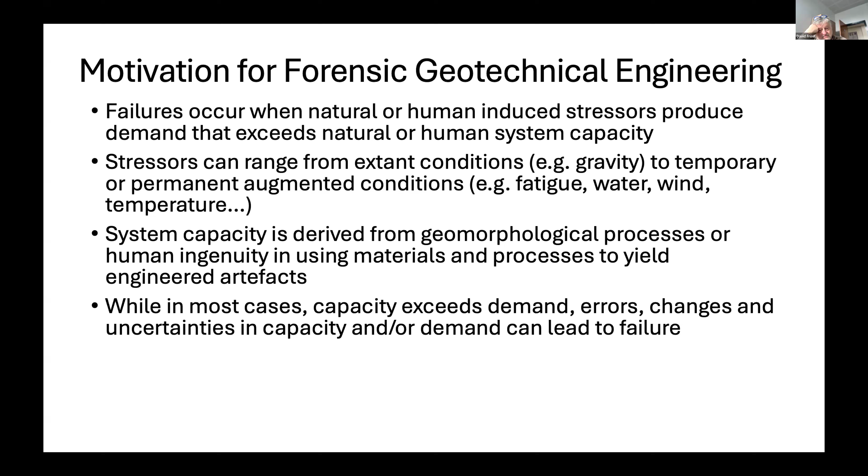The motivation for forensic geotechnical engineering begins with the fact that failures occur when either natural or human-induced stressors produce demand that exceeds natural or human system capacity. Stressors can range from extant conditions, such as plain gravity, to temporary or permanent augmented conditions, which may result from fatigue or from factors such as water, wind, temperature, and so on. System capacity is derived from geomorphological processes, or in other cases, human ingenuity in using materials and processes to yield engineered artifacts. While in most cases capacity exceeds demand, errors, changes, and uncertainties in capacity and demand can lead to failure. Failures can be either single point events or result from cascading processes that lead to failure of an overall system. Forensic geotechnical engineering offers the opportunity to learn from these failures and to ensure more resilient systems in the future.

Just a little history and purpose of TC302. It was constituted by ISSMGE in 2005 as Forensic Geotechnical Engineering, or FGE as we often say. It's involved in scientific investigations and deductions to identify the causes as well as the processes of distress in a structure or system that are attributed to geotechnical origins.

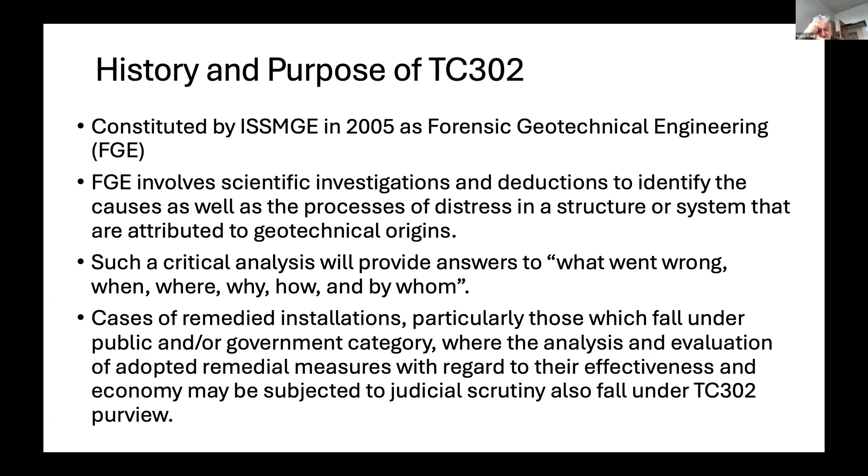Such a critical analysis will provide answers to what went wrong, when, where, why, how, and even sometimes by whom. Cases of remedied installations, particularly those which fall under the public and government category, where the analysis and evaluation of adopted remedial measures with regard to their effectiveness and economy may be subjected to judicial scrutiny, those also fall under the purview of TC302.

Just a quick synopsis of some selected past activities of TC302, predominantly in the form of symposia or seminars, listed here. Also in 2016 there was an edited volume titled Forensic Geotechnical Engineering, edited by Professors Rao and the previous chair of TC302, Professor Sivakumar Babu, part of the Developments in Geotechnical Engineering series put on by Springer. There was also a more recent seminar put on by Professor Fumio Tatsuoka on the collapse of the Fujinuma Dam.

In terms of ongoing activities of FGE, it is now conducting a mini symposium series on forensic geotechnical engineering for natural hazards impacts. It's going to be a series of symposia held in Asia, Europe, Africa, South America, North America.

The reason we're doing a series of these is in part that natural hazards evolve differently around the world, and they're also addressed with different types of solutions around the world. So we're ultimately interested in trying to understand this scenario from a more global perspective.

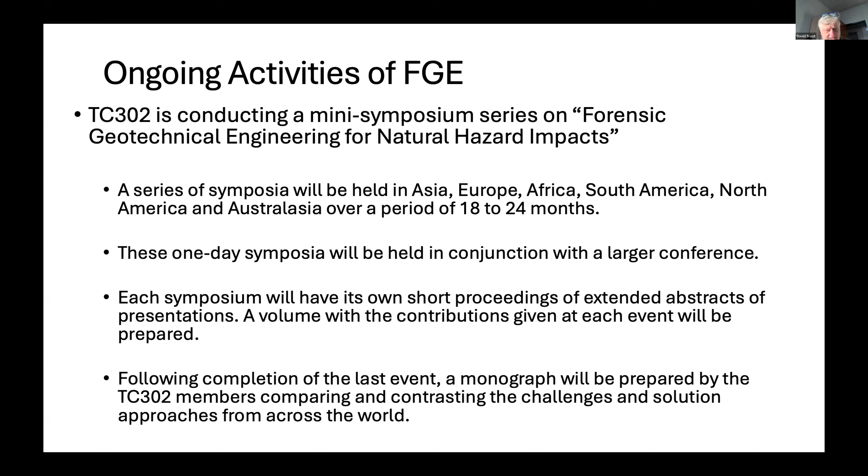These one-day symposia, typically we're holding them in conjunction with a larger conference. Each symposium has its own short proceedings of extended abstracts of the presentations made, and then there'll be a small volume from the contributions for each of those events. When we finish the last of the 6 or 7 mini symposia, TC302 will actually put together a monograph comparing and contrasting the challenges and solution approaches from across the world.

Just a bit about the ongoing and proposed mini symposia. We actually just held the first one in conjunction with Geotech Asia in Goa. We had anticipated an audience of about 50. It turned out we had 80 registered and attended, and it included speakers from government, practice, and academia.

We have 3 more already scheduled for June 2026. There'll be a half-day event in conjunction with, or as part of, ICSMGE in Vienna. In September '26, we have an event in conjunction with the CREST conference in Cambridge, England. And then in October '26, there's an event in conjunction with the ASCE Forensic Congress in Orlando, Florida, USA.

Finally, we're in discussion with folks for 2 more, which will be held in early 2027, one in South America and one in Australia. We just haven't locked down the final details of those.

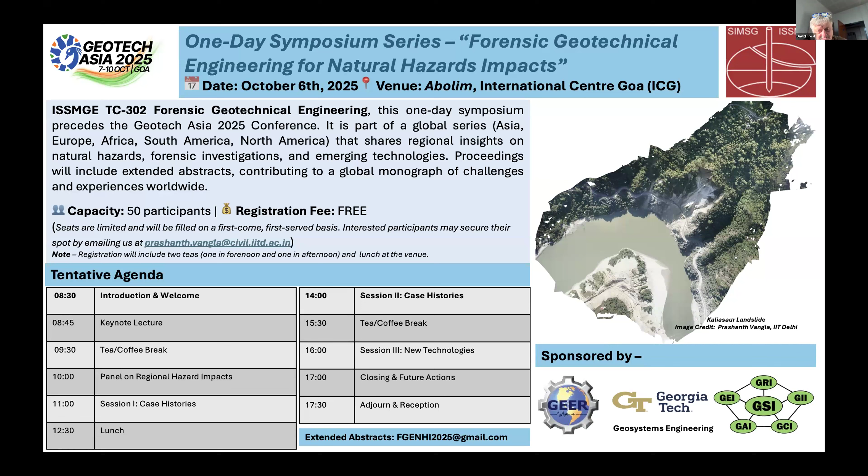This is just a quick snapshot, but gives you an idea of what a typical event looks like. This is from Geotech Asia. I think one thing we were very happy we were able to do, through a little bit of sponsorship from various entities including the Geotechnical Extreme Events Reconnaissance Association and the Geosynthetic Institute, was offer free registration to the participants, and I'm sure that also added to the value of the event.

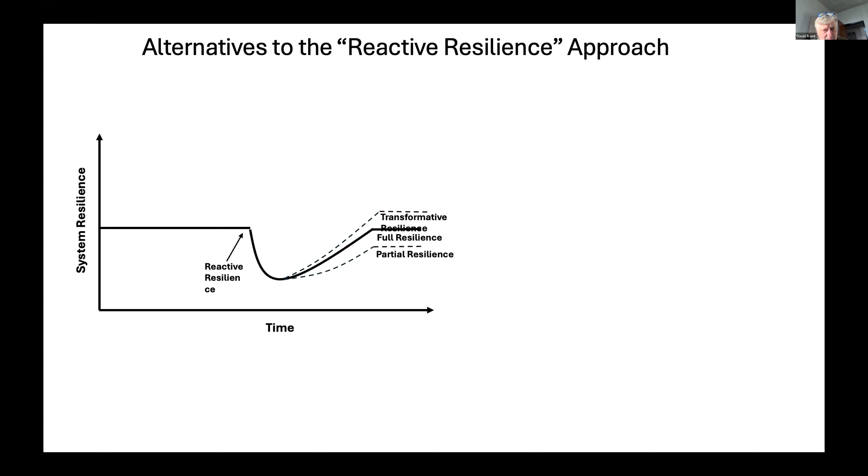All of these fall under what I call reactive resilience. And quite frankly, I feel that many times we almost accept this as the way to go. Personally, I'm not comfortable with that. I think resilient systems should embrace before, during, and after considerations, not just during or the immediate after. So in that context, resilience and forensic geotechnical engineering should not start here, though there's a tendency for that to happen.

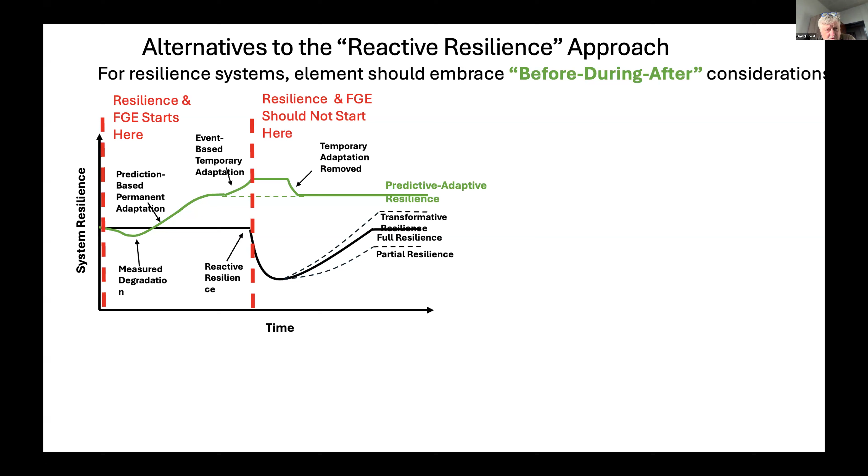But then the second part of it is what I call event-based temporary adaptation. This may be where we've made a permanent adaptation, but then as we're aware of an event about to occur, we may be able to make a temporary adaptation that will further increase the resilience. Once the event has passed, we can even remove the temporary adaptation if we like. The end result is that we end up with a higher resilience than if we just live within the reactive resilience world. I call this predictive adaptive resilience.

On the other hand, if we learn that we're going to have an even higher event, then we may think about putting some kind of a temporary adaptation on top. The most common one that all of you probably could think about right away is sandbags, and that's something that's done very quickly in the days or hours before an overtopping might occur.

That's a good example of a temporary adaptation, although it does typically create more problems because the sandbags after the event are typically contaminated, and then we have to dispose of those in landfills. So I think the idea is good, but I think we need to start to think about more temporary adaptations that don't have a legacy tail, for example one that has an environmental impact.

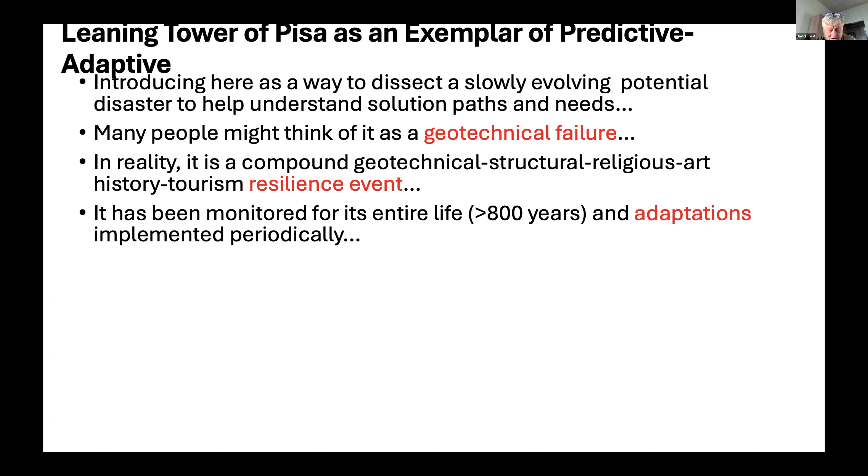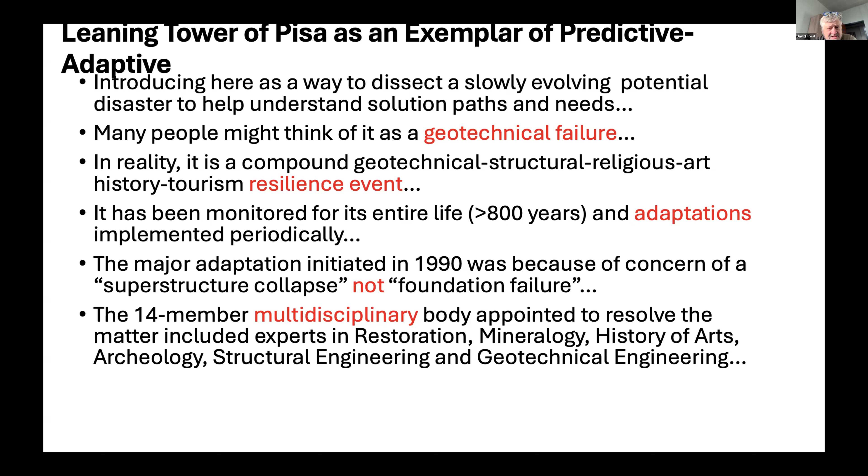A major adaptation was initiated in 1990 because of a concern for a superstructure collapse, not a foundation failure. It was a potential for a superstructure collapse that led to it. The 14-member multidisciplinary body appointed to resolve it included experts in restoration, mineralogy, history of arts, archaeology, structural engineering, and geotechnical engineering. I make that point because I think we need to recognize the importance that forensics needs multidisciplinary, different opinions, different perspectives.

I would note, however, since we're amongst geotechnical friends, it was led by geotechnical engineers, and I like to think that that's an important mantra.

So a little bit of history of the tower. On the upper left is showing the actual loading of the tower, the weight of the tower. As you can see there, and in the images on the right, they started construction in 1178 or 73. They built the first 4 stories, and then they stopped because they started to observe a lean.

In fact, they stopped for 100 years. So there was an adaptation which said no more construction—that was simply the adaptation. At that stage, they restarted, and they made some adaptations in the process to try and offset the existing lean. They added another 4 stories, and then obviously the situation continued to get exacerbated.

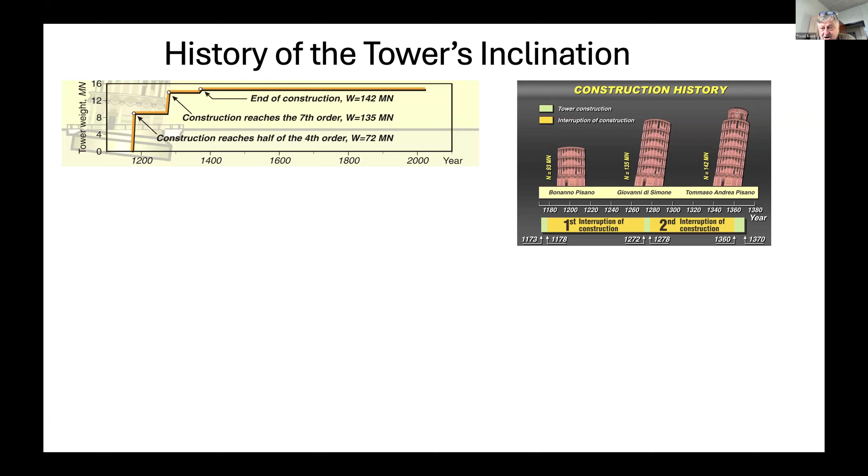So there was another second interruption for 100 years before finally they came back and put the bell tower on in the late 1300s. There were numerous—that's why, David, it's curved.

Yes, because they were going up, they were straightening, and then it kept tilting. So it has a curved shape.

Included in those adaptations, for example, they halted the construction, but they also used tapered bricks to offset the lean. They used different height steps within the tower so that for people walking up it didn't seem as inclined. They did excavation of the Catino at one stage because they thought that might help, and they tried lowering the groundwater. In fact, some of the latter two had the opposite effect. They were not good interventions.

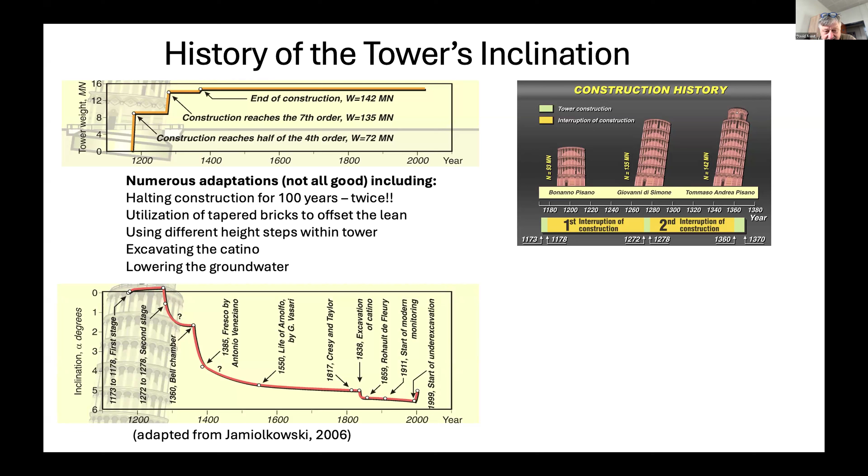This is a plot matching the one from below that was put together by Professor Jamiolkowski, showing the inclination and the lean. You can see that clearly things were progressing downwards, and that's why in 1990 they closed the tower and realized there needed to be a major intervention.

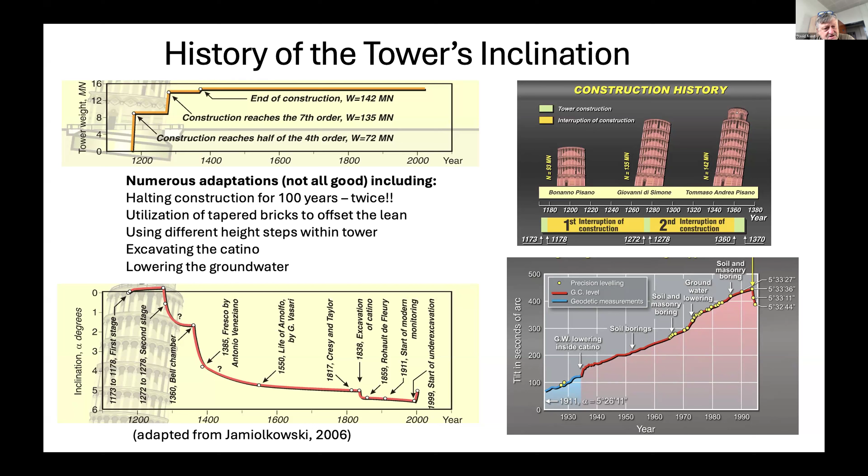This is a more detailed look at some of the more recent movements, over the period from 1930, so the last 100 years. All of these various dots show times and places where people tried to do interventions. The bottom line was anytime they tried to do a serious intervention, the tower responded. It was not happy with humans dabbling around.

So let's come back and look at my resilience curve. This is that classic resilience curve that I showed you. And we can't afford to be reactive.

If nothing had been done in 1990, then—and I'm very careful to show that this is not real, because otherwise somebody will see this webinar and say, oh, David Frost said the Tower of Pisa collapsed. So it's not real. But we can't afford to be reactive.

So now come back and I'll add my predictive adaptive curve. Let's take a look at what the Tower Restoration Committee did. Well, first of all, they put a massive amount of instrumentation in there. There's just a quick synopsis here.

They literally, if somebody walked in the door at the ground level, there were instruments detecting that, whether they were vibrometers or whatever. So they had an exceptional level of instrumentation in the background as they were conducting their studies.

The permanent adaptation was based on predictions, and in the interim to get to this they did model studies, numerical modeling and so on. The bottom line was they realized that removing soil from under one side of the tower could help reduce the lean. At the same token, they were concerned, so they had two temporary adaptations that they utilized.

One was the lead weights that they put on the high side, and the second was they actually put cables strapped around the tower at the third level in case the tower started to move. As a last-ditch effort, they'd be able to put some tension in those cables and try to pull it back. Well, needless to say, they completed the permanent adaptation.

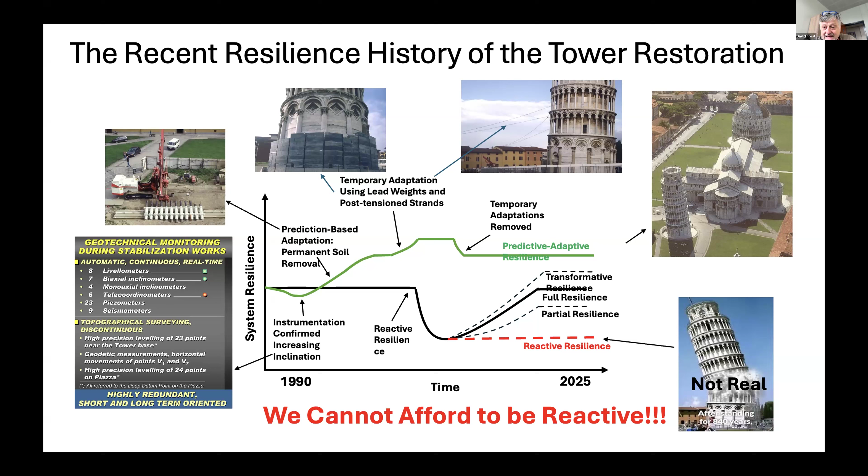But it's a predictive adaptive resilience. Even if it starts to lean again, at a worst case scenario, the feeling is that they've gained about 300 years more performance out of it before it may get back to the same condition it was in.

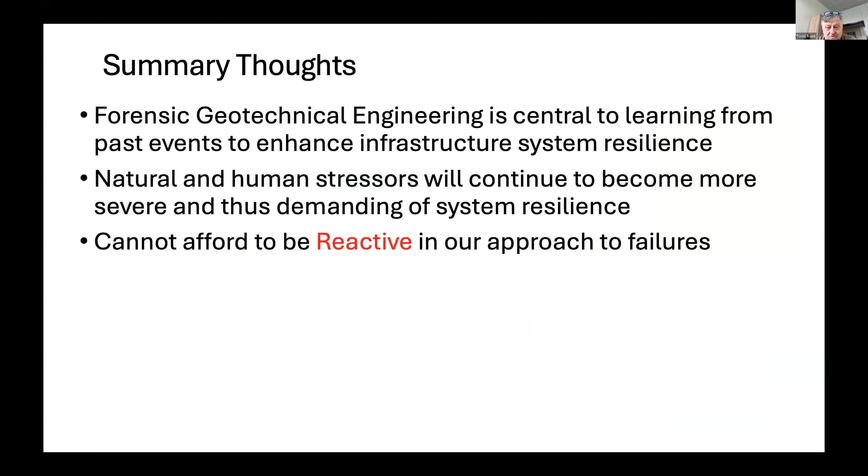So, a few summary thoughts. Forensic geotechnical engineering is central to learning from past events to enhance infrastructure system resilience. Natural and human stressors will continue. We cannot afford to be reactive. We need to recognize when resilience, and thus FGE, should begin. We need to think about infrastructure systems that include permanent and temporary adaptations, and we need to learn now using FGE to avoid future failures.

And ISSMGE TC302 has obviously an important role to play.

Thank you. Thank you, David. I am really impressed by how active you are in TC302 all over the world. And unfortunately, we missed you in Goa. I came maybe one day after you left, but yeah. We'll meet again on the board. Yeah, absolutely, in Vienna, I'll for sure see you.

In Vienna, yes. And I like your graph. Actually, I stole it with print screen.

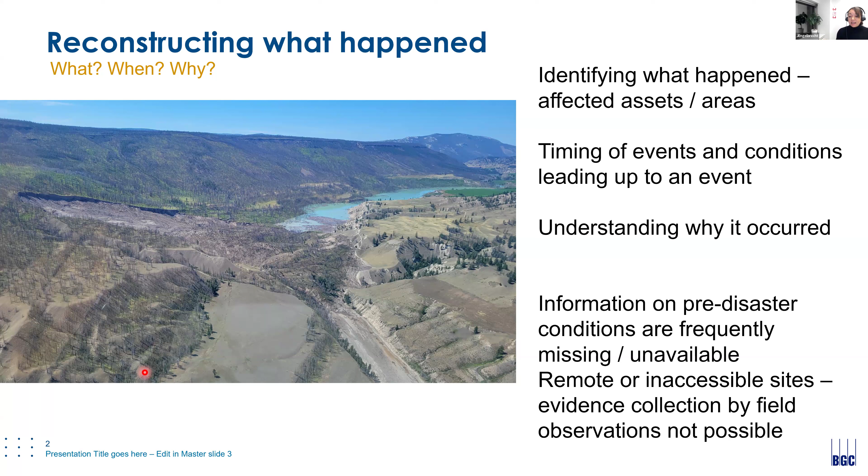Now, to do this effectively, we need information on pre-disaster or pre-event conditions. Very often this is unavailable or not easily accessible, and the situation gets worse if after an event we can't quickly get to a field area to collect in-field evidence. This is really where satellite Earth observation plays an important role.

There are thousands of satellites orbiting the Earth currently, and a lot of them have the ability to collect data for Earth observation purposes. In fact, the first images of the Earth's surface were collected in the 1970s already, so we've got a very large history of the Earth's surface, almost anywhere on the globe, that we can extract from satellite data.

The kind of information that satellites can provide is building baselines, establishing what the conditions were on the ground before an event even happened, and detecting potentially precursors to events. So if we think about landslides, we might see an acceleration in movement of the Earth's surface before catastrophic failure, and we can piece together a timeline of events.

The big advantage of remote sensing, of course, is that these images cover potentially large areas, so we get a synoptic view of the area, not just the affected infrastructure, but the surroundings as well. We can build a time series of events, with multi-sensor capabilities - satellites that image the Earth in microwave wavelengths, and multispectral data that can tell us about water coverage, vegetation health and productivity, and so on.

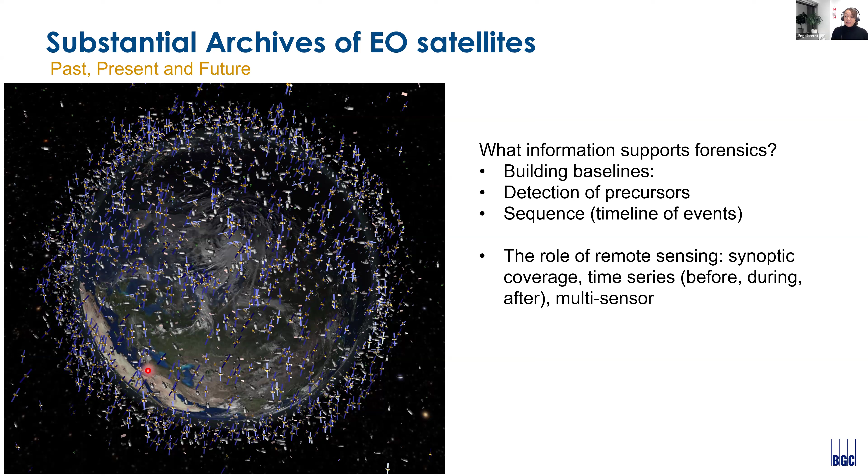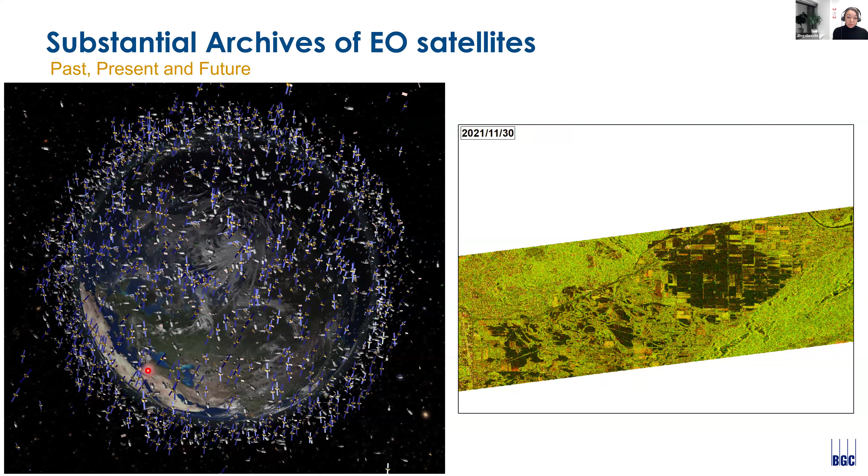In this image on the screen, this is captured daily after a flood event in Vancouver in 2021. After the flood event, we had daily satellite images that were captured, which we could use to monitor the retreat of the floodwaters. This kind of information was sent directly to our geotechnical engineer in the Disaster Management Center, and they could use this information to plan their daily field inspections to clear houses and buildings from the evacuation zone.

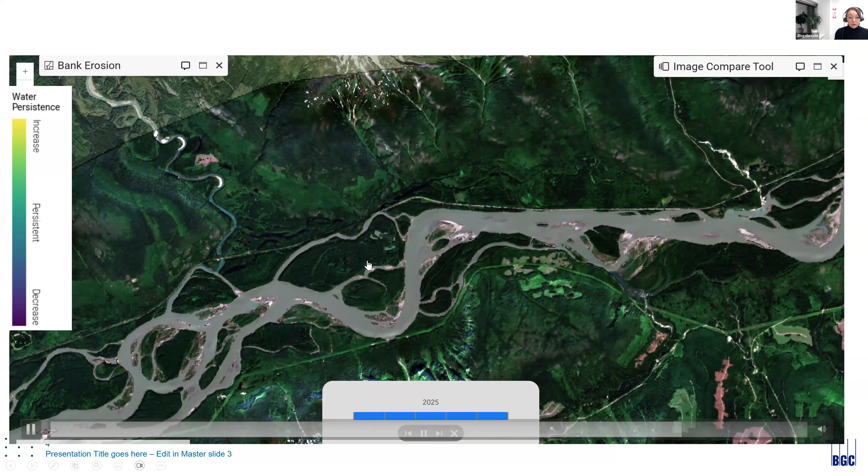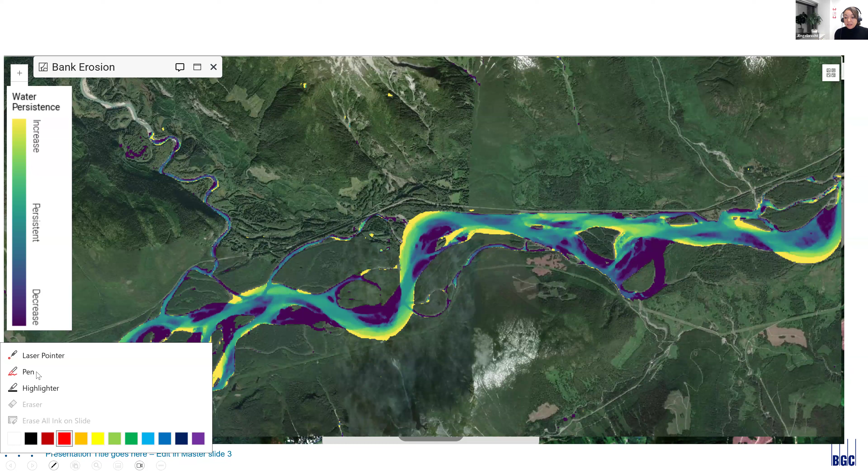Now, because the satellite images go potentially back to the 1980s or even the 1970s, we can start to monitor those slow creeping hazards that are impacting infrastructure that we might not know about before. In this video, we can see a riverbank, and between the 1980s and today, we are tracking the slow progression of this riverbank as it encroaches on roads and railway infrastructure. This information we can use to identify and measure rates of bank erosion, and alert infrastructure owners that a river might potentially be impacting that infrastructure in the near future, so that we can be a bit more proactive about managing geotechnical hazards.

This is an example from the recent Myanmar earthquake. In this case, we used synthetic aperture radar images captured before and after the event to identify where drastic changes on the Earth's surface were taking place. We did this mostly to try and identify where there were collapsed buildings, but because we've got synoptic coverage, we could zoom out, and here we could see the rupture zone of this fault was very clearly identified in these damage proxy maps.

We could also use multispectral satellite data to map changes in vegetation health and productivity, or the density of vegetation. Comparing pre-earthquake vegetation to post-earthquake vegetation, we could identify where potentially co-seismic landslides were happening after that earthquake.

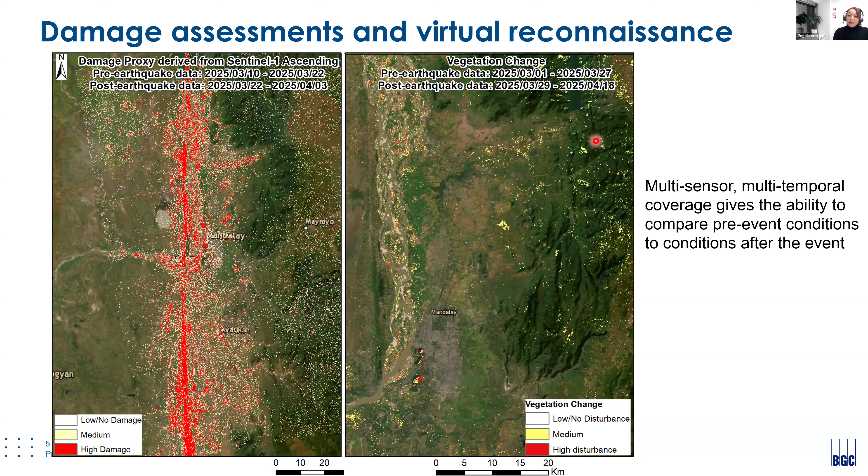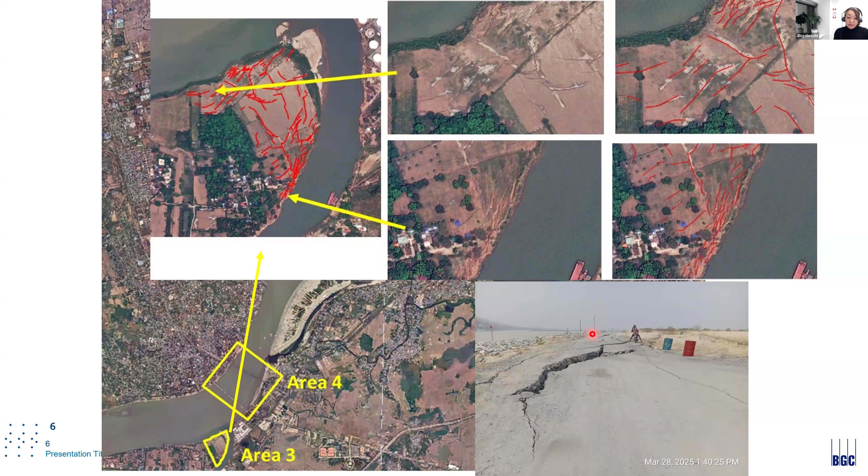And then, of course, focusing on high-resolution data, we can start to identify individual structures that were damaged. But this information is also very useful for additional information extraction, like identification of tension cracks, looking for signs of liquefaction. And of course, all of this information is just strengthened if we have field evidence that is collected as well.

Building on what David talked about previously, we can be very reactive if an event happens—we can analyze the satellite data to try and piece together what happened. But because the satellite data exists already, we can start to be very proactive about disaster risk management by learning from the past to inform the future.

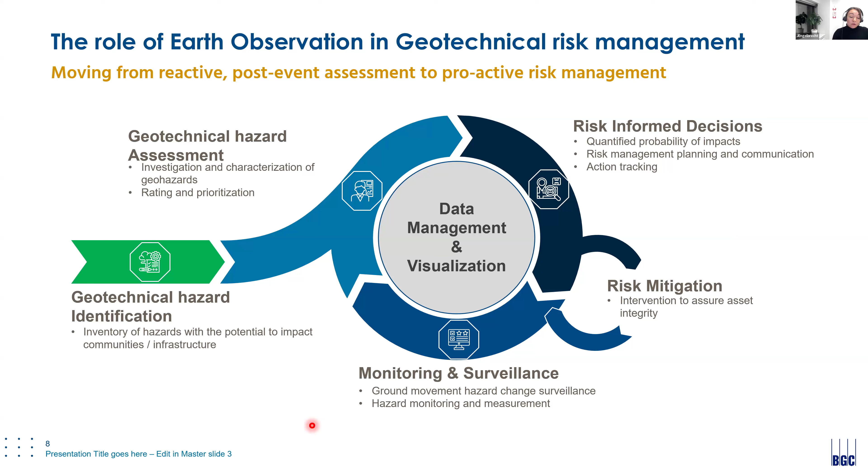And all of this leads to risk-informed decision-making. So we can plan for more resilient infrastructure in the future. We can plan for risk mitigations for existing infrastructure, and we can do ongoing monitoring and surveillance to make sure the risk profile of an area isn't changing.

So the example that I want to use for all of these phases is a technology called synthetic aperture radar interferometry, or InSAR. InSAR data is derived from Earth orbiting satellites, and it allows us to measure millimeter to centimeter scale movements of the Earth's surface.

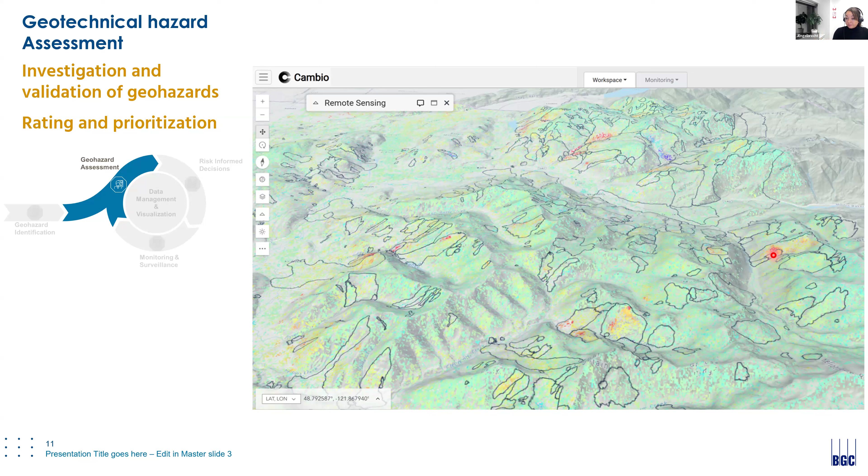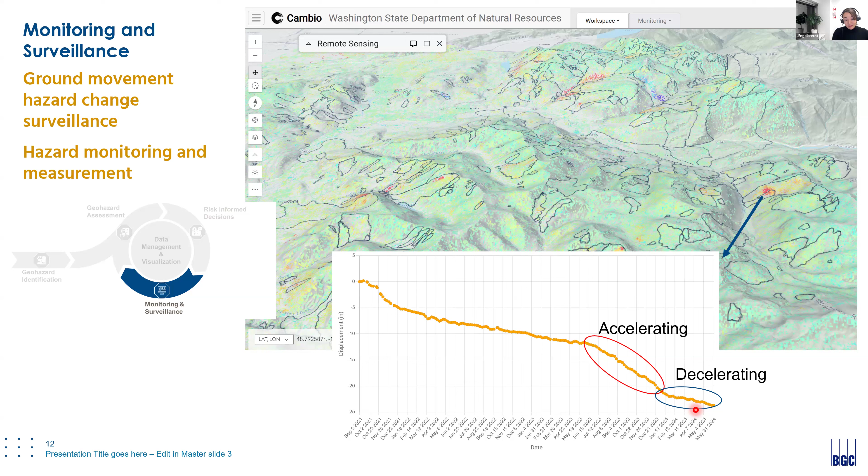And then, of course, because these satellites have been around for a while, we can piece together the displacement history of these landslides. We can look for accelerations and decelerations in movement. And once we recognize that there are periods of acceleration or deceleration, we can try to figure out what is causing them to accelerate during certain periods.

So in this example of this landslide, we could identify periods of acceleration. Here we extracted hydroclimate data—soil moisture, precipitation, snow melt. And we recognized that the periods of accelerated movement actually corresponded to periods where it was wetter than normal.

So once we recognize that a landslide speeds up when it is wetter than normal, then we can plan for mitigations, for example, dewatering of a slope.

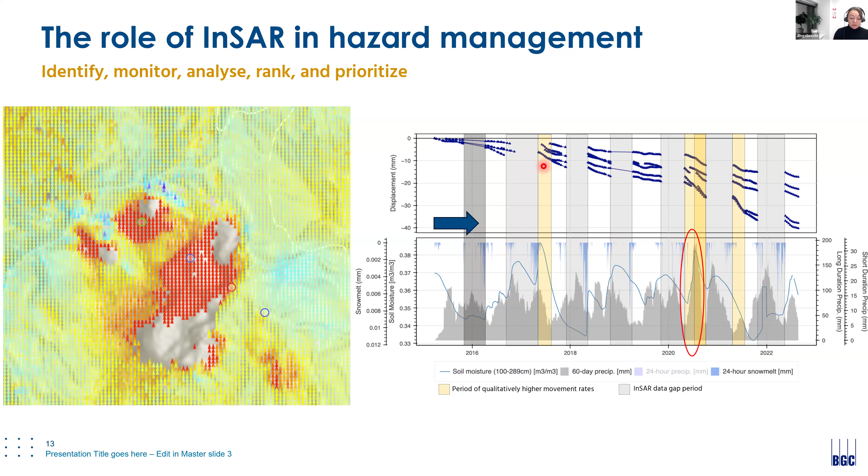And all of this, of course, feeds into risk-informed decision-making. Once we know that a hazard is present, and we know the proximity of the infrastructure that we care about, we can start to do calculations like probability of the hazard occurring—so probability of a landslide catastrophically failing—the probability of a hazard having a spatial impact on infrastructure, and the vulnerability of the infrastructure. That then allows us to rank and prioritize these hazards either for detailed geotechnical investigation or potentially for mitigation.

So there's a couple of emerging technologies that allow us to do this quicker and faster and incorporate more Earth observation data. We already spoke about the large number of data sets that are available, but there has also been a recent change in most government policies to make data freely available on an open access basis. And this means the cost of incorporating remote sensing into our programs is coming down quite dramatically.

And then there's also advances in computer infrastructure. We have data warehouses like Google Earth Engine that allow us to take our algorithms to the data, process it online, and only download the results.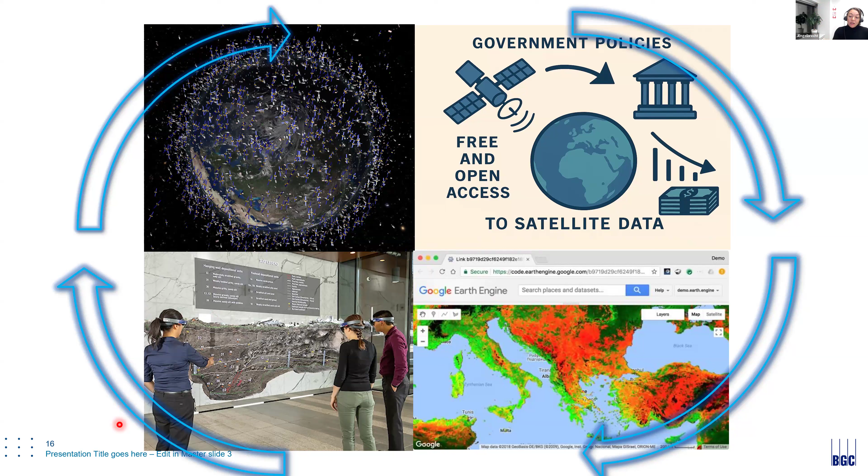So we don't have to have massive computers anymore, and we don't have to download terabytes of data. We can process all of that data online and just download the results we're interested in. And then the final component is advances in how we communicate hazards through technologies like mixed reality or virtual reality.

So just to end it off there, there's a lot of benefits of using remote sensing data. We can establish baseline conditions. We can piece together the chronology of events. We can do ongoing monitoring for disaster response. And these rapid virtual damage assessments allow us to help forensic teams prioritize inspection areas by focusing on high-risk areas and areas with potential secondary impacts as well. And that's it, happy to take any questions.

Dr. Jeanine, I have been to many conferences and many remote sensing presentations. I think this is one of the best. Thank you, thank you so much.

Quick question for the viewers, they're probably asking, can I do this in my region? How accessible are these satellites for remote sensing, like InSAR or others you recommend? I know some of them give free data, yes, but what's your impression? It depends on the satellite data you want to use, but there's been the USGS and the European Space Agency Copernicus constellations. They're capturing data all over the globe, and the historical records are available and freely accessible. So those are quite medium resolution to low resolution datasets, so it depends on your needs.

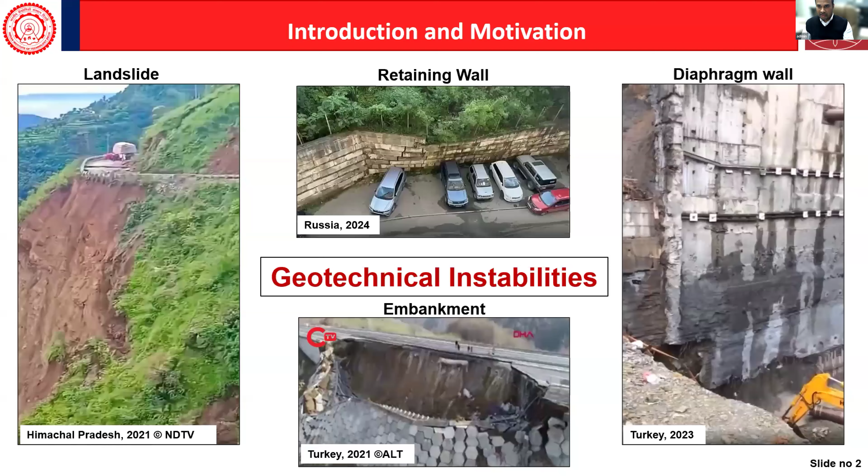So my motivation comes from the fact that geotechnical systems such as slopes, retaining walls, and embankments are increasingly failing under climate extremes and rapid development. As Professor David Frost mentioned, reactive approaches respond only after visible distress, leading to major losses. To improve safety and resilience, we must shift towards predictive, adaptive strategies supported by advanced instrumentation that detects early warning signals and guides timely intervention.

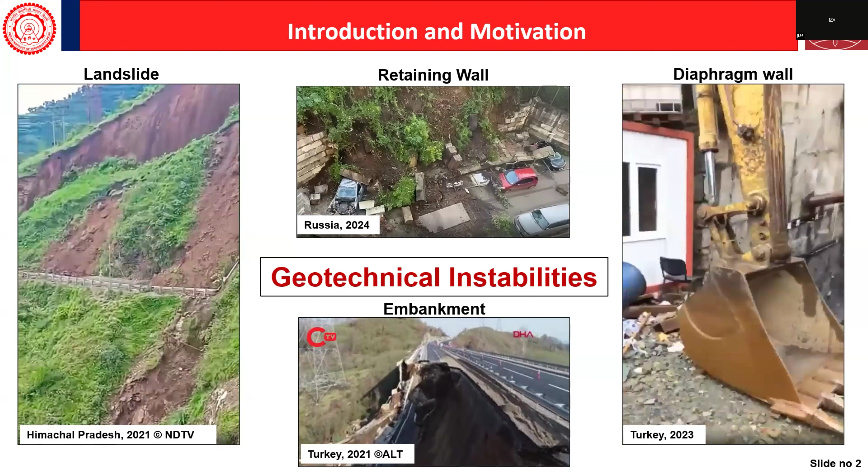Importantly, the same monitoring systems capture critical data during and after failure, converting disaster into valuable knowledge for improving design, modeling, or future risk mitigation. This drives the need for accurate, reliable, and smart geotechnical sensing solutions.

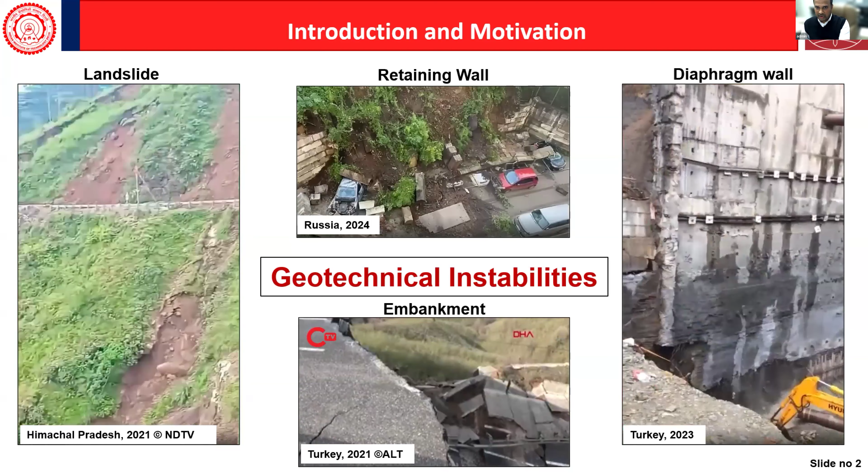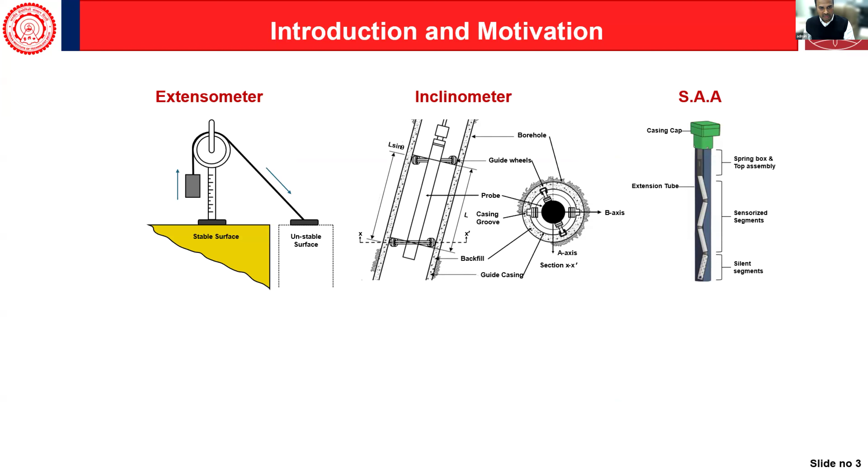So before I go into the technology we are working on here at IIT Delhi, I will quickly go through existing technology. As you see, we all know the extensometer, inclinometer, shape acceleration array—these are being used in most constructions. However, these have their advantages as well as disadvantages. We all know these sensors feel what is happening in the soil, but I think maybe it's time for us to listen to them actually.

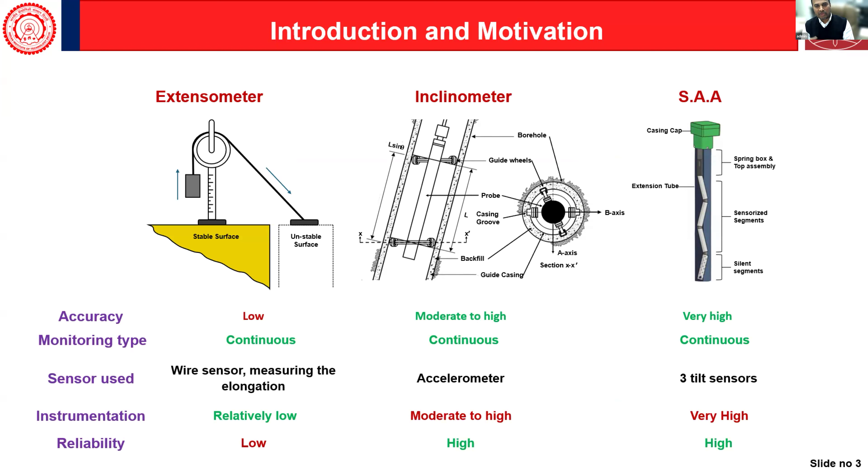So if you listen, I think you may get more information than what these instruments provide us. This motivation didn't occur only recently, it was in 1981 after Koerner, where he learned that in the soil there could be acoustic emissions from the soil particles. These acoustic emissions are nothing but elastic waves, typically ranging from 20 kilohertz to maybe up to 300 kilohertz. These are due to grain friction, particle crushing, particle collision, force chain breakage, and grain cementation fracture. These activities basically result in AE generation. So Koerner, instead of conventional instrumentation that only detects displacements after they occur, had the idea to listen to the soil for early micro crackings and failure processes.

When Koerner proposed in 1981 the passive waveguide, they basically inserted a rod and tube into the soil and let it act like a stethoscope. However, it has some limitations. The major limitation is the attenuation of these acoustic waves generated by the particles, and the failure plane location is unknown and may not connect to the sensor path, leading to highly variable response because of soil heterogeneity.

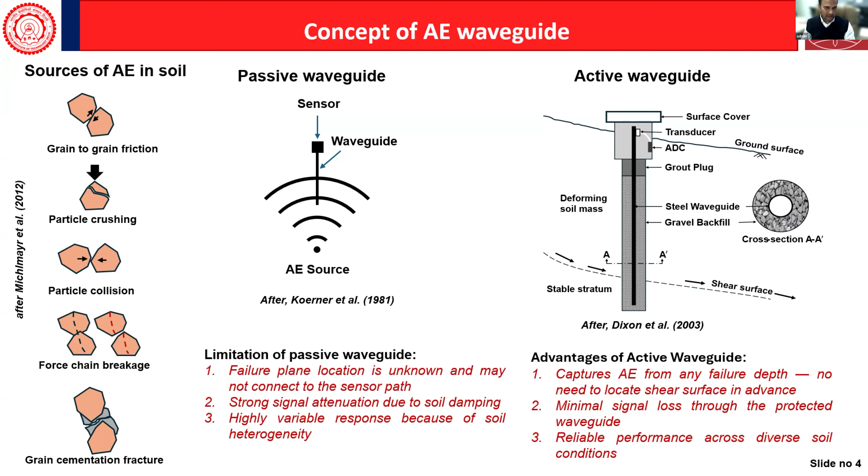So in 2003, Dixon et al. proposed that we should have an active waveguide instead of a passive waveguide, which can capture AE from any failure depth with no need to locate the shear surface in advance, minimal signal loss through the protected waveguide, and reliable performance across diverse soil conditions. Basically what it has is a tube surrounded by annular fill, which could be granular fill, and the interactions between the tube and the annular fill result in acoustic waves that pass through this tube, which we can measure. This animation helps illustrate what I'm talking about.

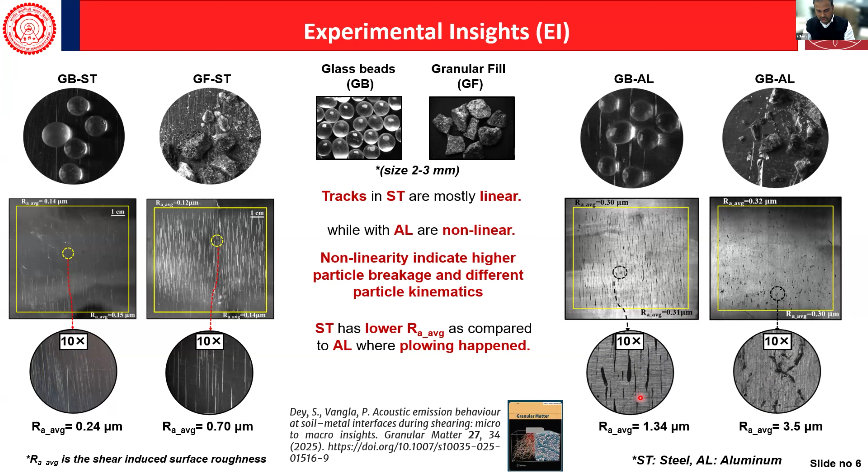Unlike what Koerner proposed, where particle-particle crushing and friction generate AE, in the case of the interface, this is important for the acoustic waveguide because the interface is where the initial failure takes place in the device, much prior to the failure of the host soil wherever it is placed. If you see this steel surface, you see linear tracks formed by the angular particles, whereas with glass beads the tracks are less significant. With aluminum, which is softer than steel, you see more nonlinear tracks. These indicate particle breakage, and because of the angularity and ploughing mechanism, the interface causes different shear response as well as acoustic response, which I'll reveal in the subsequent slide.

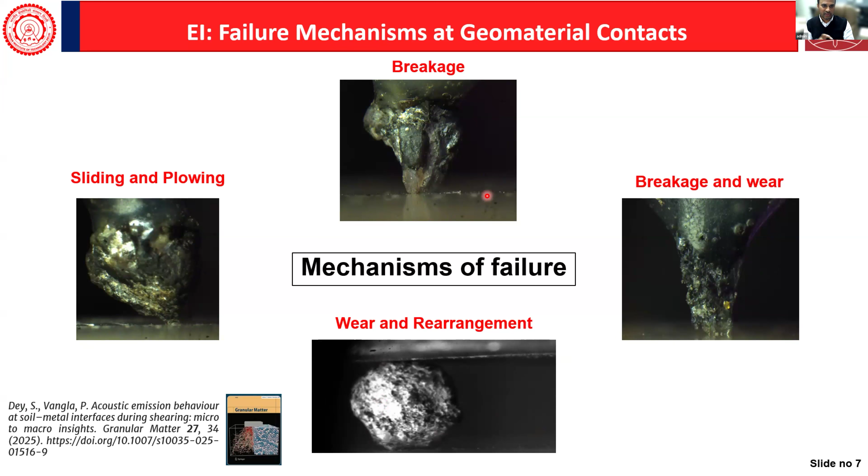So these are the single particle test experiments we've done at IIT Delhi to look into what is actually happening at a contact level. Unfortunately my animation is not working, but when this particle shears against a plate, there could be breakage, wear, and particle rolling at the interface. All these mechanisms result in different AE signatures, so deciphering those signatures and understanding the acoustic response is very crucial for the interpretation of these AE-based waveguides.

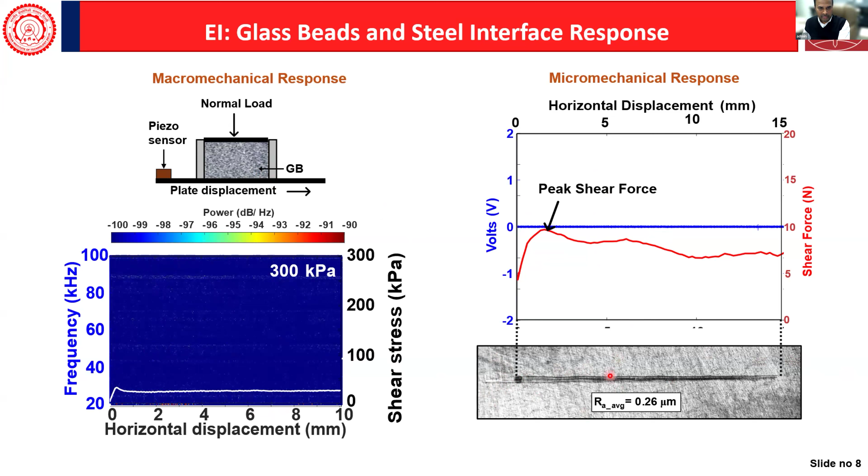When a single particle shears against steel, you see there is no acoustics, but there's a shear response, which tells us not all the granular fill that we're going to use in the active waveguide may generate the acoustics. So it's important to identify which particles, which material, is going to provide acoustic emissions.

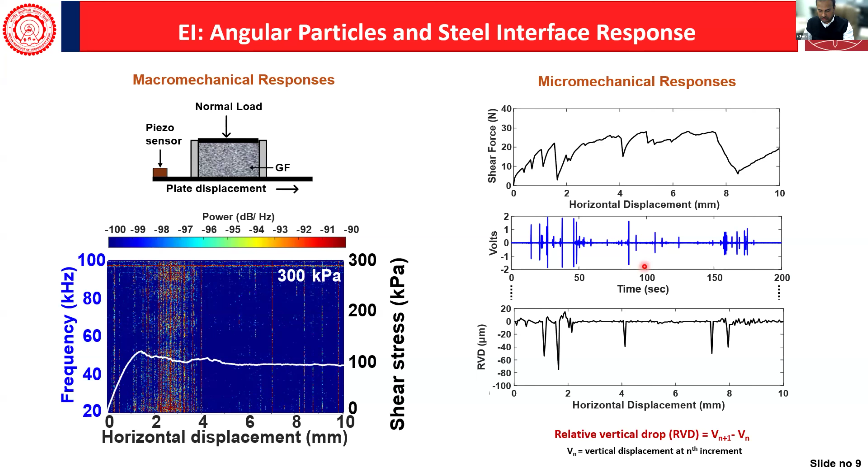From the single particle test, wherever there is a drop in the vertical displacement or the shear force, you see acoustic spikes are noticed, which means the mechanisms dictate the acoustics at the interface. So again, I reiterate, the selection of material plays a significant role.

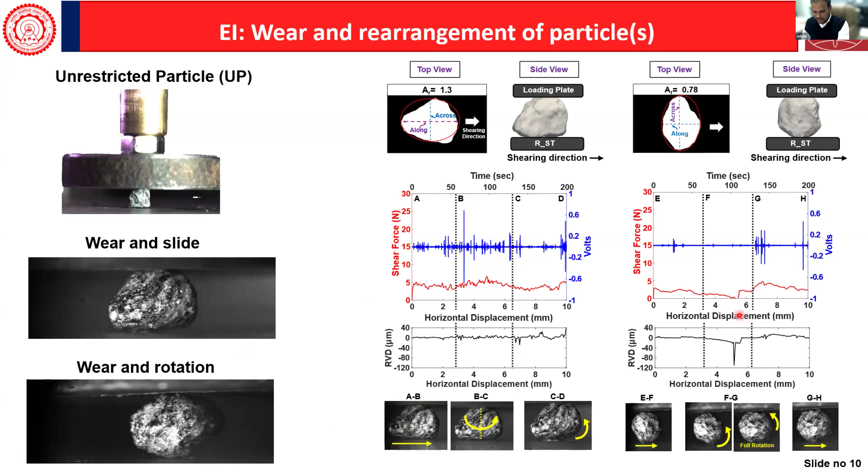So from the multi-scale analysis, what we observed is that the selection of particle properties and the continuum metal properties plays a significant role, as this slide presents.

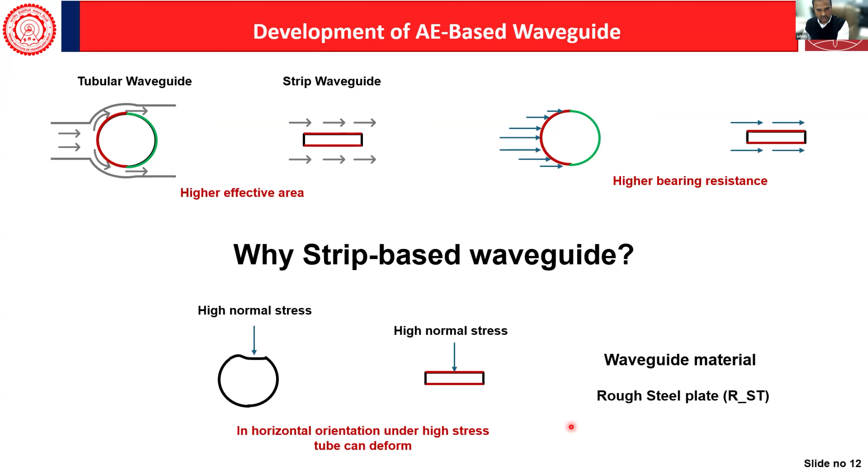So we have developed a strip-based waveguide instead of a tubular waveguide, which is typically used. Why? Because it has a higher effective area, higher bearing resistance, and in horizontal orientation under high stresses a tube can deform - this may not happen with the strip-based design. And it's easy to place anywhere in the structure, maybe in a retaining wall. I'll show some examples in the subsequent slide.

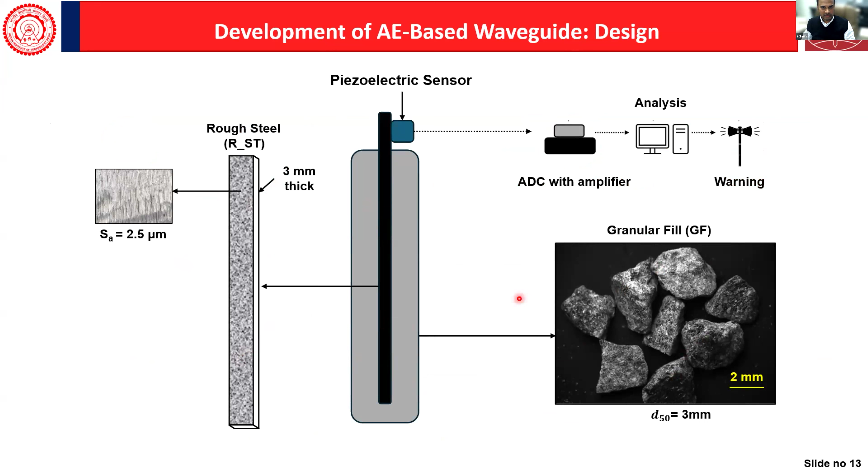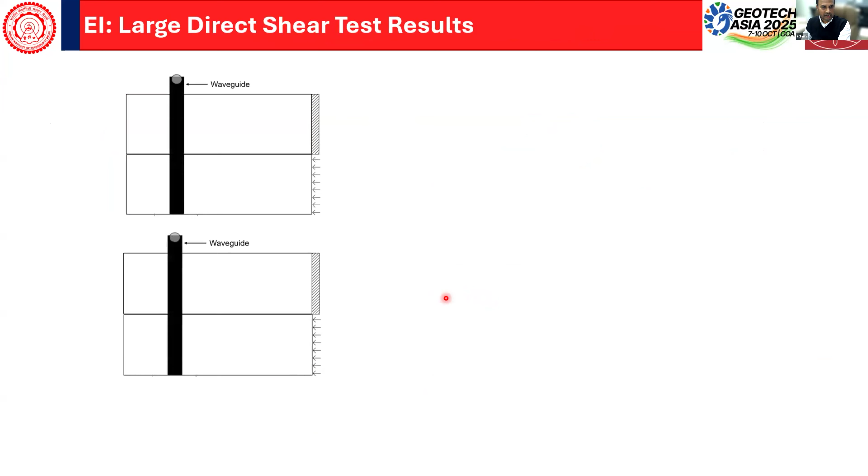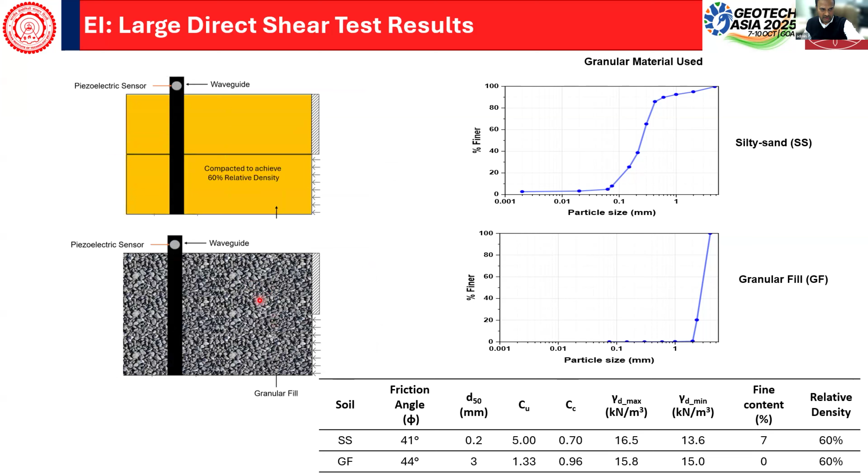If you see the angular particles at the bottom of this slide, they've shown different acoustics compared to the silty sand - we'll show this in the subsequent slide. The silty sand, shown in blue, and the angular sand, shown in black, both have similar shear strength properties.

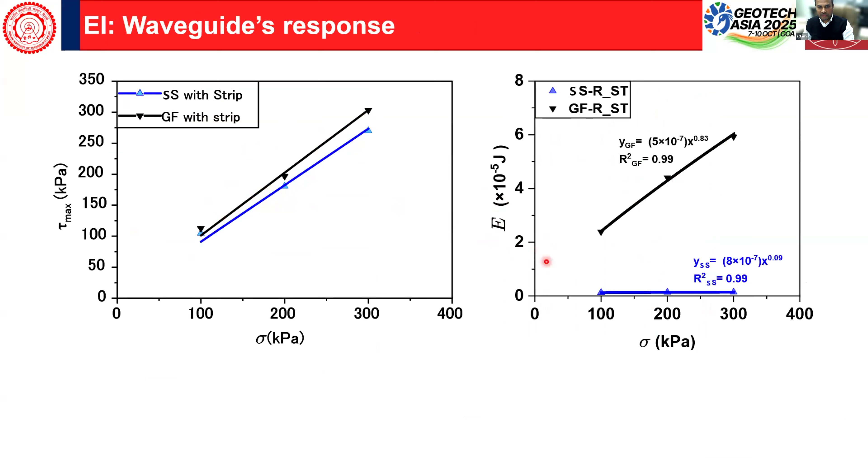Whereas when we look at the acoustic spectral energy, which we calculated, there is no spectral energy or acoustic emissions noticed in the silty sand. This means not all particles will generate acoustics, so we have to be very selective when we use this acoustic approach.

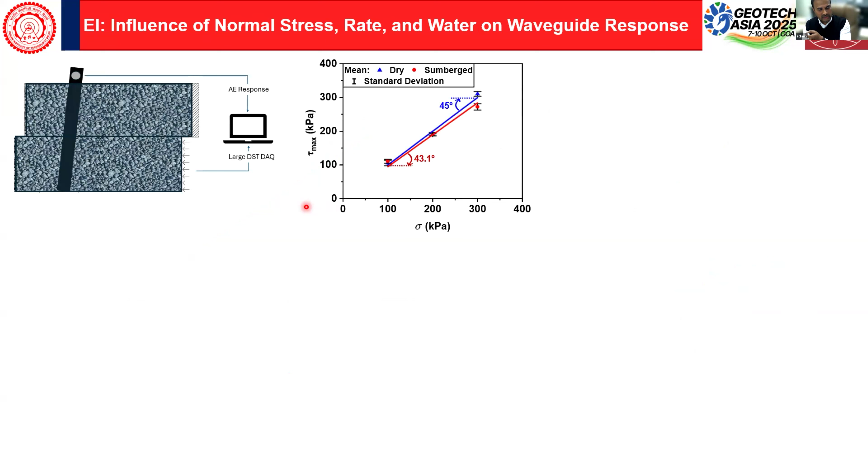The next experiments involved the presence of water. What we're actually interested in is how the displacement rate affects acoustic emissions, how normal stress affects acoustic emissions, and the presence of water - because these are the three things crucial for us to understand what is happening in the system.

As you see here, when we did the direct shear test on the granular fill with the strip, the failure strength seems to be almost similar.

When we calculate the spectral energy for both dry and submerged cases, the spectral energy is significantly reduced when water has come into the system. This indicates that though it is decreased, it is not completely negligible, it is still significant. But with respect to the dry case, there is a reduction.

For the case of displacement rate, for dry and submerged at 100 kPa normal stress, the red indicates submerged, whereas the blue indicates the dry. There is a rate of increase of acoustic emission increasing with the increase in displacement rate, which indicates that the wall or system is failing at a faster rate. This is important information we can get from the sensor.

The magnitude of the blue and red curves is increasing with increasing normal stress, which tells us that we can also predict at what depth this failure is taking place, because the magnitude of the acoustic emissions is changing rapidly.

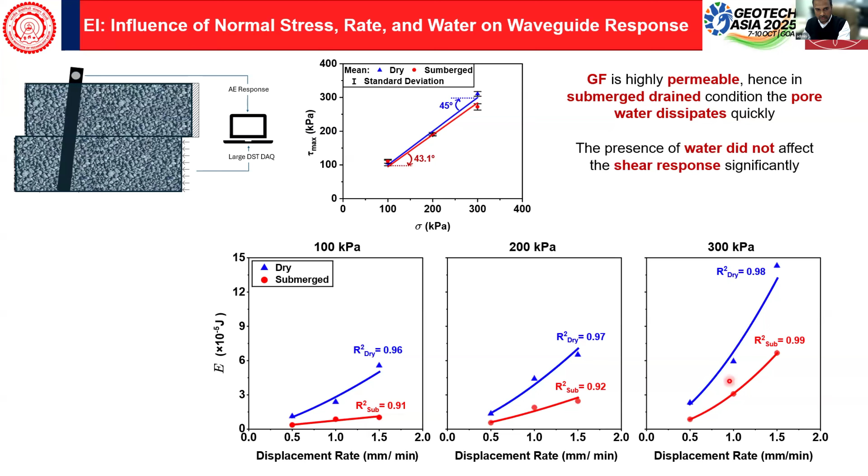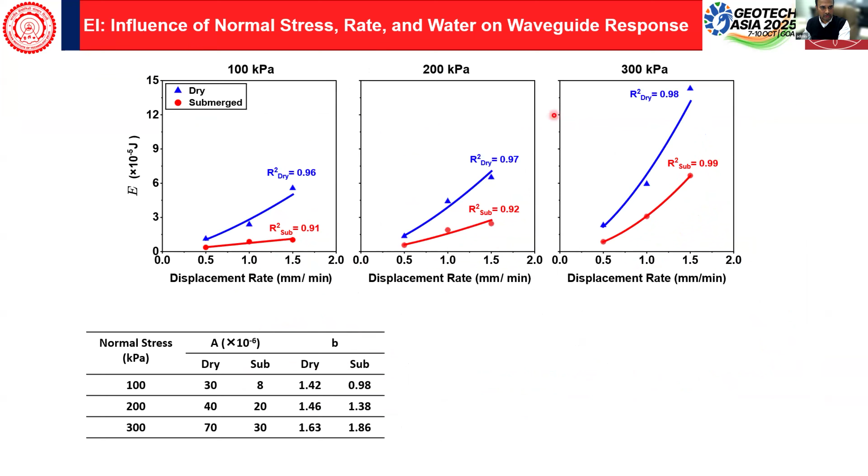That's one beauty. We have presented this in terms of the AB parameters, which we fit using the power plot, to understand how the AB parameters change. I've already explained how these vary with displacement rate and at different normal loads and under the presence of water.

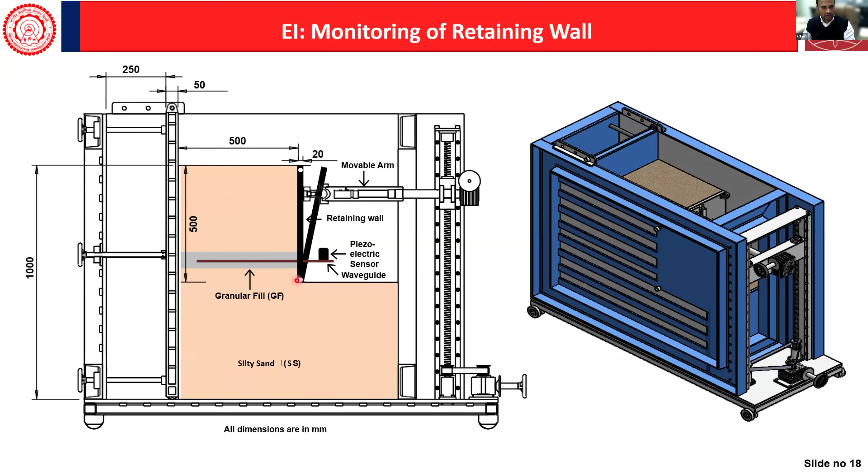Moving to an example, a model study we carried out with a strip-based retaining wall, placing the sensor at the bottom of the retaining wall as shown here. The height of the retaining wall is 1 meter and the width is around 0.5 meters. We placed it at the bottom and then did a test.

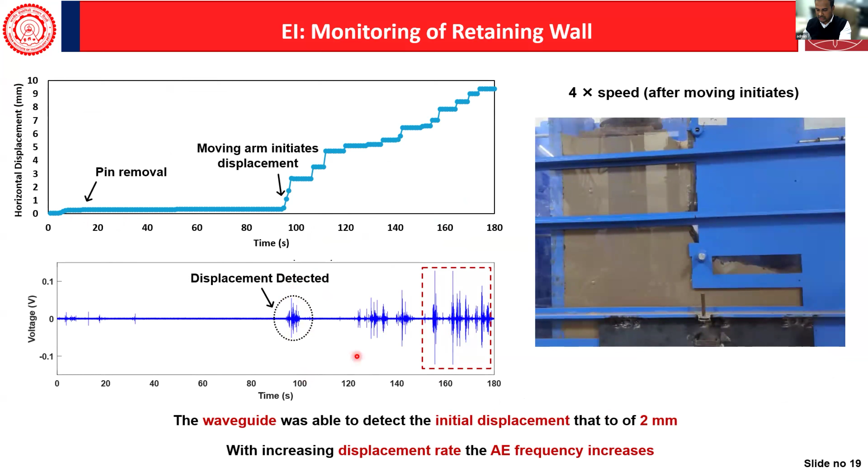We removed the pin and allowed the wall to rotate at the bottom. When we removed the pin, we waited for some time to see if there was any acoustics, and there was none. Once we started allowing it to rotate, we noticed some spikes indicating wall movement. This is clear from our multi-scale analysis that these sensors can be very sensitive and accurate.

Major conclusions: factors like normal stress, displacement rate, and roughness increase the AE responses. Normal stress increases the response linearly, whereas displacement rate increases it exponentially, and roughness helps in early detection of AE.

What matters is it acts as a dual purpose system: early warning before failure plus a post-failure forensic recorder, like a black box in an airplane. It offers monitoring and forensic clues such as failure depth, displacement rate, and water table effects, and also provides a low-cost, scalable alternative to traditional instruments.

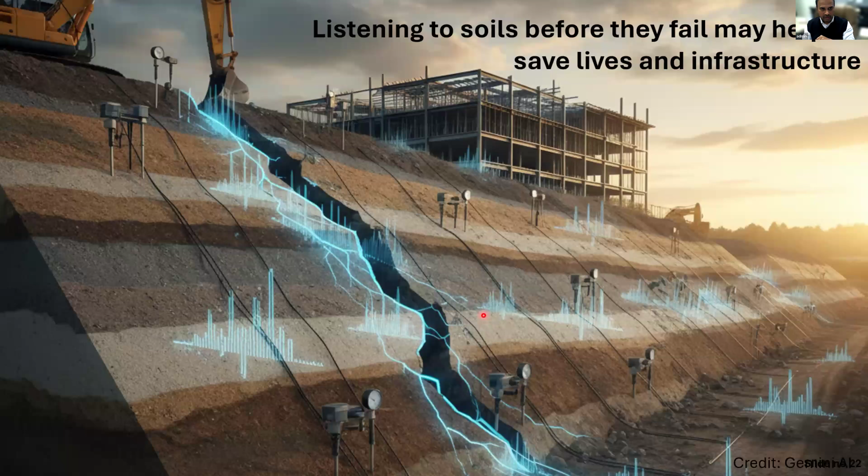Very nice, listening to the soil is important, I guess. I like that you can use it prior and after. I really like it, and it's new to me. It emanates from non-destructive testing of piles, even before that, non-destructive testing of aerospace shuttles, where they check acoustically for any damages during their journey in the cosmos. Thank you so much for your presentation.

Dr. Wei Li, you're next, the floor is yours. Try to catch up if you can, I would appreciate it, because we went a little bit overboard with time. Will you be able to look at the screen and the slides? Yes, yes we can. Okay, this is okay, right?

Yeah, perfect. Okay, first I'm really honored to be able to join this ITT talk. I think way before that, in the 2010s and 12s, I joined a lot of the ISSMGE lectures, touring everywhere. Nowadays we have a lot of fancy tools like Zoom, so we'll be able to share our experience without going very far or to dangerous places. The farthest I've been is Lahore and Bangladesh. So it's a good thing we'll be able to meet online.

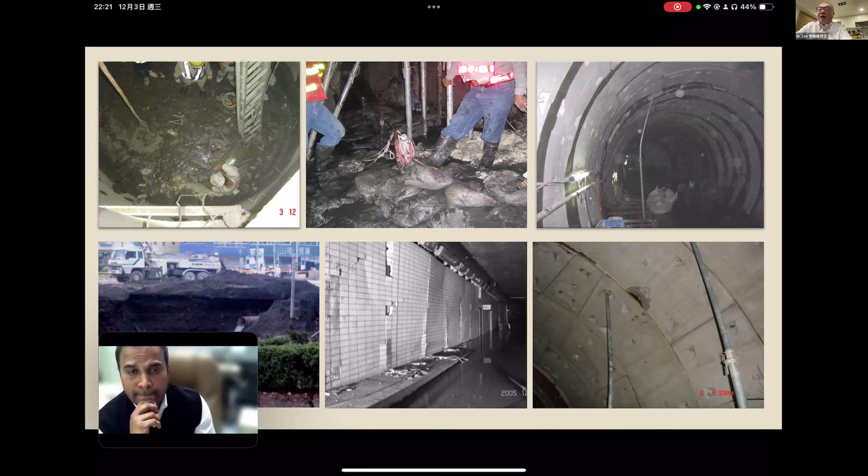They were sheared off, and then tap water shot like a water gun into the pit, creating a very large hole like the underground one shown here.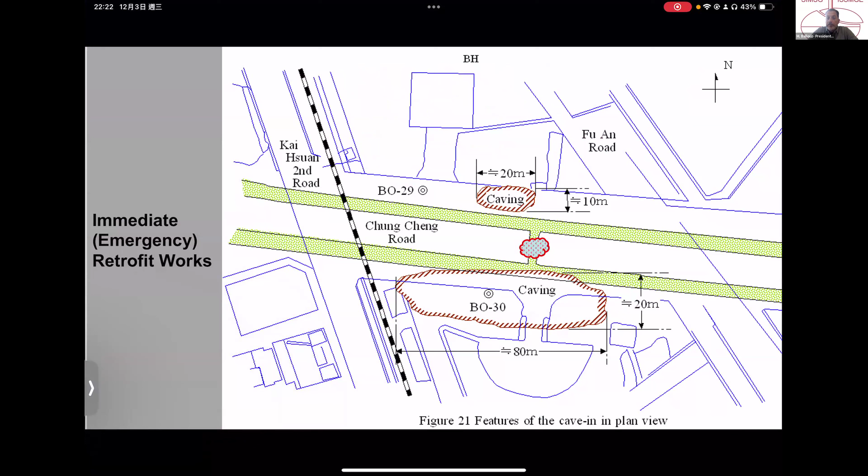This is a quick drawing made about 1 day after the accident. So we have a small cave-in hole in the north and a rather large one in the south. The red dot indicates where the failure started.

The red marking is the settlement survey. Can you go back one slide? Where is the tunnel here? Which direction is the tunnel? The tunnel is the green one.

The green one is the two Chung Cheng tunnels, and the water sump is located in between the green ones, the two tunnels. There's a water sump for what we call the cross passage tunnel, which collects the rainwater.

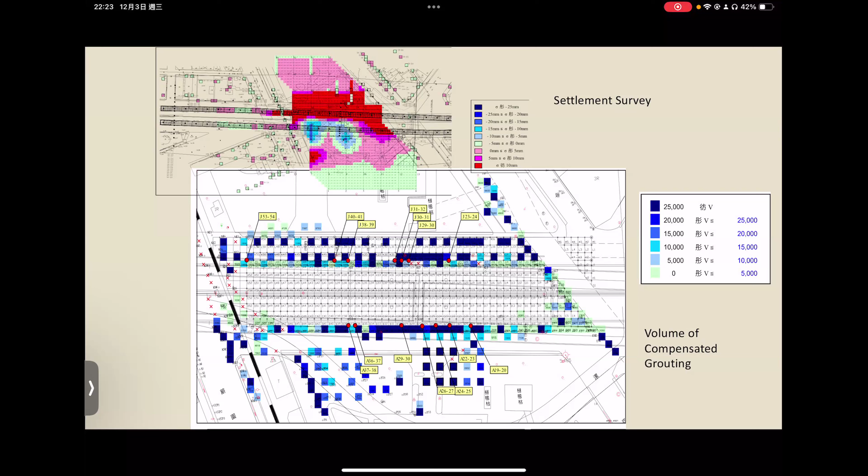Okay, so quickly - we did a settlement survey to make sure the ground failure is not expanding to anywhere else. Then we immediately did compensation grouting, indicating how much grout we injected into the ground. While doing the grouting, we still found the ground was not stabilized, so we figured there must be some other issues.

But in Taiwan, we have done a lot of deep excavation using slurry walls. Whenever the excavation pit shows some failure signs or damage, the direct mitigation measure is to flood water into the pit. So we figured maybe the problem was because of the water - the sheared water main shooting water into the ground - and we hadn't been able to stabilize the hydrostatic condition.

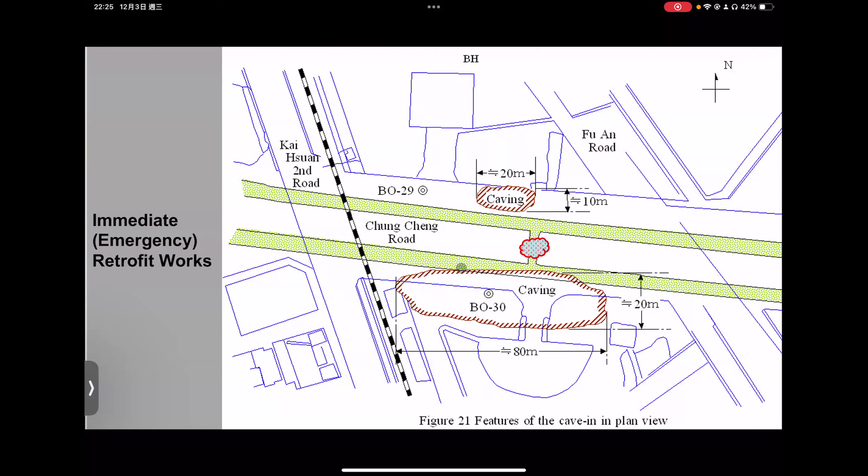So starting within the tunnel, we built a double wall system to plug the 4 tunnels. If you look at it, we plugged the tunnel in this way, this way, this way, and this way. By plugging it, we were able to maintain the hydrostatic condition.

So then we started to investigate the damages. First, at that time in 2005, the RIP - resistivity imaging profiling method - had just started. We have a lot of 2D cross sections; this colorful one is the image analysis, the RIP image analysis. The schematic drawing is Professor Kenji Ishihara's drawing of the failure cross section, with speculations to describe the failure based on the RIP image we obtained.

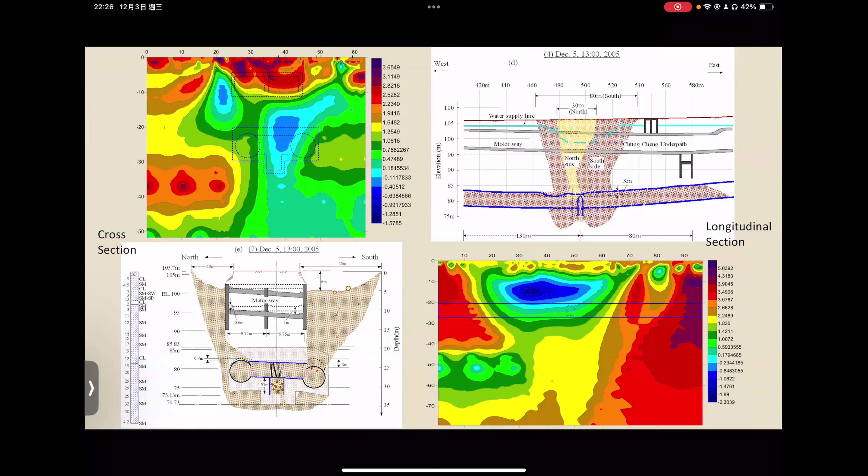So the left side is the cross section view, and the right side is the longitudinal section view. Then we had to do physical investigation - we couldn't rely on just the resistivity image profiling method. We did borehole investigation to see if we could reach the top of the tunnel ring segment, and we found that in the center part, we actually lost all the tunnel ring segments.

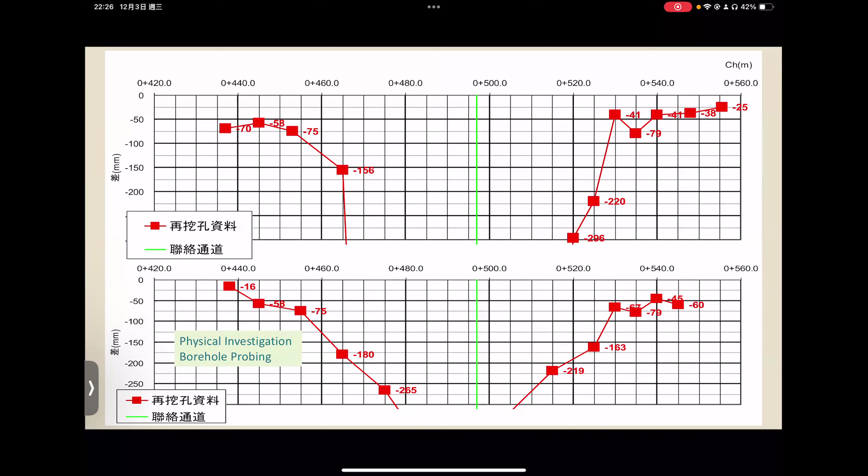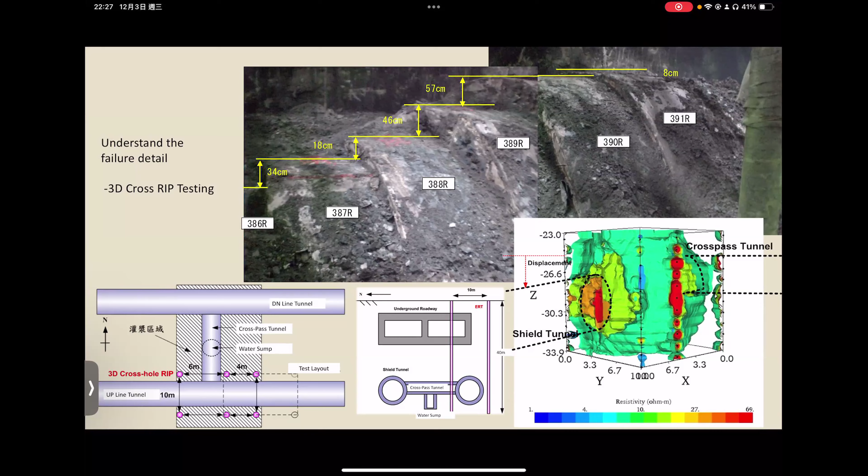After you investigate the failures, the first thing you have to review is the design. When we learn from the manual, doing grouting manually, you always have the circular or circle representing the grouting performance, and you design for overlapping, maybe 2 overlapping, 3 overlapping, or only 1 overlapping. But in reality...

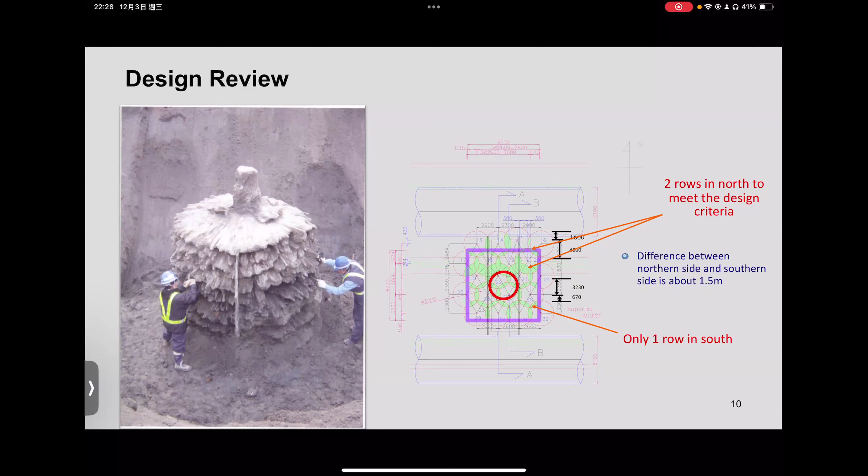This is the real scale verification testing we have done with the Maeda company in the test pit. Actually, when you encounter some special soil, your grout doesn't really form columns or circular piles standing underground. Maybe it's like a Christmas tree. So the overlapping may have some fissures or cracks.

So at that time, Professor Ishihara and I were thinking about how we can test the soil, or how we can characterize the soil. Especially, we found out it's non-plastic silty sand. So first, Professor Ishihara started the pinhole test.

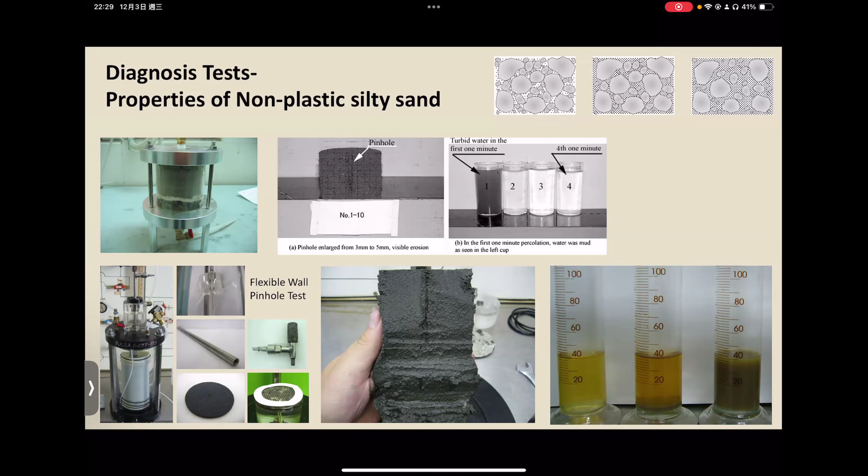Then I figured out that's 30 meters underground, so we have to apply some pressure. We had to enable the pressure for the pinhole test to be operated under high pressure. So we developed the flexible wall pinhole test to really test the erodibility of this sand under 3 kilograms per centimeter squared.

The lucky thing is, since this was a government project with a big scale failure, we were able to spend the money to dig out all the remains. After we finalized the permanent retrofit method, we decided to excavate everything down to see the failures. If you look at the top left, it's the actual performance of the grouting for 3 meters large diameter grouting under 30 meters deep soil.

We also found out that where the failure started, the water sump was filled with debris and soils. We also found the steel doors we had closed when the failure started, but they didn't perform well. And then we were able to understand the failure of the entire cross passage tunnels and also the ring segment damage.

I think the most exciting part is when we started the retrofit works. All the retrofit works to save the infrastructure or structure from the failure are totally different from design work. When we learn design from university or college courses, we design everything from scratch.

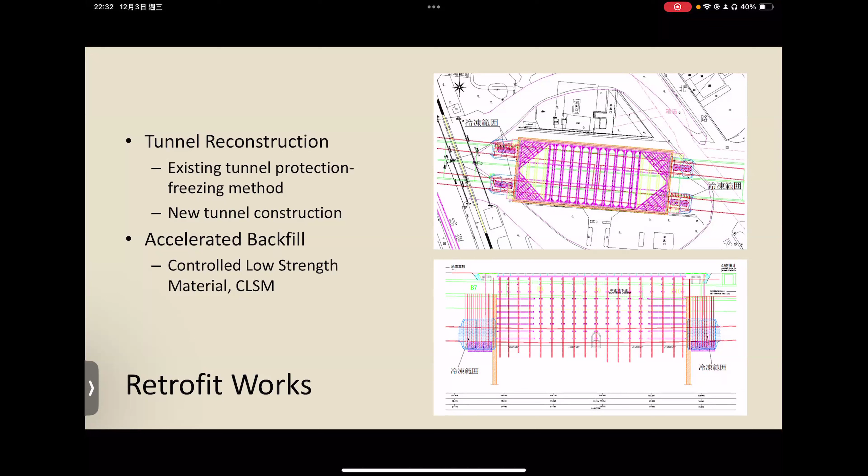So we introduced, at that time, the controlled low strength material, CLSM. This is the retrofit work to secure the existing tunnel. We're using the ground freezing method, actually using the existing underground pads as a pumping station for the freezing agents. This is the freezing method securing the ring segments, and this is the assembly of the new tunnel underground.

For the new tunnel, we reconstructed to replace the damaged one. You see this place is also very difficult to compact or even to fill. So later on, this is a view where we start using the CLSM to fill it.

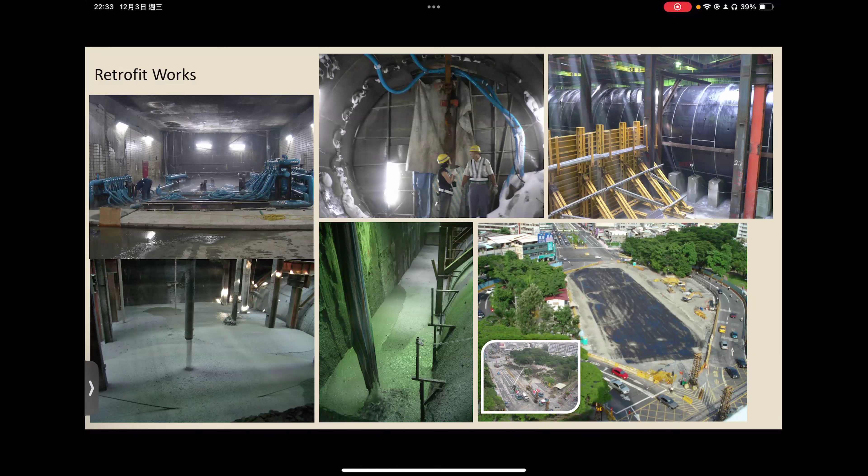We call it flowable fill. It can actually freely flow and fill up all the space. This is after the retrofit, after the tunnel is constructed and in place, filled up to the ground surface. So, lesson learned.

I think for 20 years, I have done all the forensic investigation of different kinds of failures. There's a common point in most failures: the final stage of construction. Everybody starts to get loosened up, and then always small issues linked to serious damage.

So quality control, or one of the last things before excavation - I repeat this so many times, I just become so careless. And then the failure causes, I think for geotech, especially within urban areas or mostly for slopes, groundwater is always the major factor. And the quality defect, construction quality defects, or less knowledge about the soil property - in this case, it's both.

Lesson learned 2: forensic investigation - we have to develop possible failure scenarios, and then new technology. I think Jeanine described a lot of the large scale technology to observe the failures, and then also Prashanth is also talking about the micro scale technology to observe the failures. And this is another case for the photos.

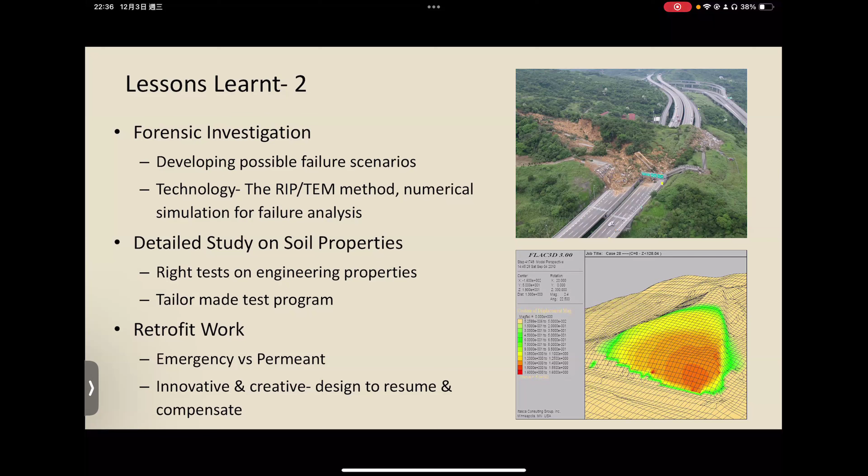Lastly, but not the least, the design to construction issue - constructability, well understanding the soil conditions. This is also a previous case. When we look at all the photos during the excavation, the slope toe was already inclined, slope toe was already exposed and cut. So no wonder the movement of slides had already occurred.

And then with rain water seeping in for almost 20 or 30 years, the sliding surface developed - even with all kinds of ground anchor security, the ground anchors still eroded, and then with the corrosion and also the slide surface, slides developed into mass failures.

So risk control and monitoring - I think this really kind of echoes David's and Jeannine's conclusions. Risk identification, I think with all kinds of technology, we also need expert experience. And then also during construction, during operation, we need dynamic prioritization and monitoring of all the risks.

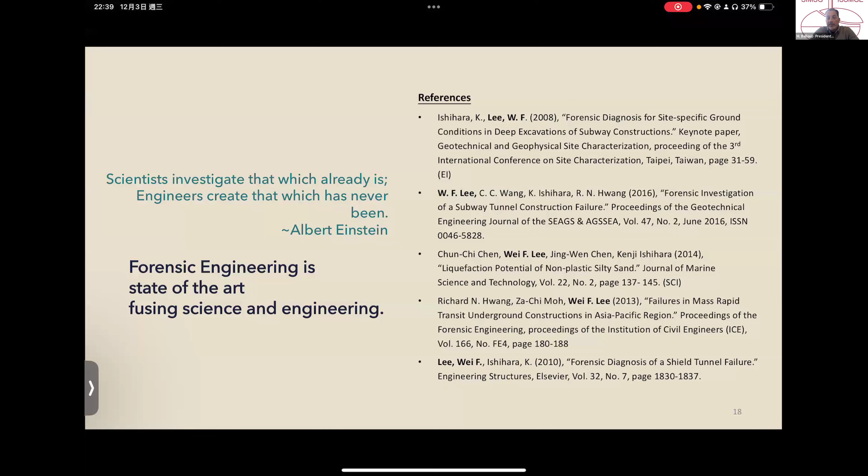Wei, thank you so much. You helped me say the conclusions. Thank you to all of you. This has been a really fantastic session with David starting about the TC302 on forensic geotechnical engineering, then macro with Jeanine, to micro with Prashanth, and then you, with a really nice case history. We're probably going to need another 15 hours with you to understand the details of that case. But thank you so much for putting it together. I wish you all a wonderful day. And because of that Christmas tree, I wish you all Merry Christmas too. Thank you so much. Thank you.

If you want to add anything, David, to conclude, you're welcome to. We went a bit overboard, but it was needed. I realize we went a little bit long, all of us, but that being said, I think there was a very nice message that came through the sequence of talks, showing that forensics is about before, about after, about macro, about micro, and then a lot of very careful work during the actual investigation to understand what happens. So I think you got a very good picture of what TC302 is about. I really appreciate your work and efforts, and wish you all the best. Ciao, ciao. Thank you. Thank you. Thanks a lot for this opportunity. Bye-bye.